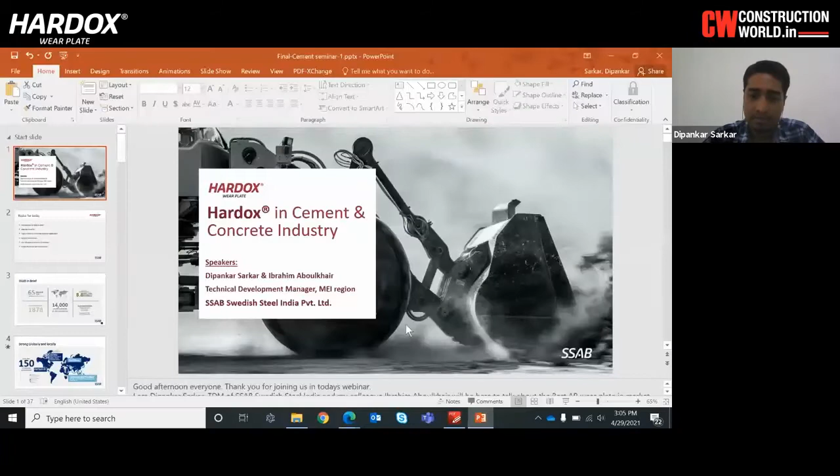Good afternoon, everyone. I hope you are seeing my screen right now. My name is Dipankar Sarkar. I am the Technical Development Manager for SSAB Swedish Steel India Private Limited. I'm taking care of India operations, and with me, my colleague from Germany, Mr. Ibrahim Aboulkhair is here, and he's looking after the Middle East regions. And today we'll be talking about the various applications of Hardox wear plates in the cement and concrete industries and how it benefits the customers.

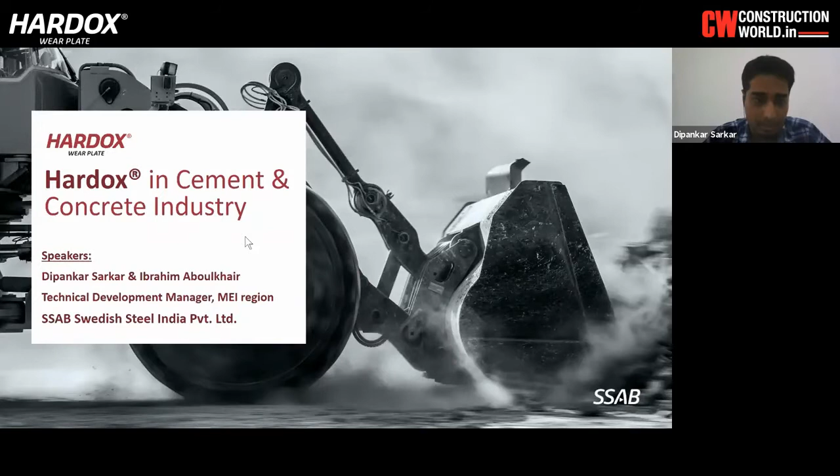SSAB in brief. SSAB Swedish Steel is present in the global steel market since 1878, that is more than 140 years old. We have a production capacity of 8.8 million tons annually, and currently we have 14,000 professionals who are supporting our customers in 50 countries. Despite having a pandemic year, we have managed to score annual net sales of 65 billion Swedish krona. We have mainly three steel divisions: SSAB Special Steels, SSAB Europe, and SSAB Americas. And we have two subsidiaries, that is in Finland, Tibnor and Ruukki Construction.

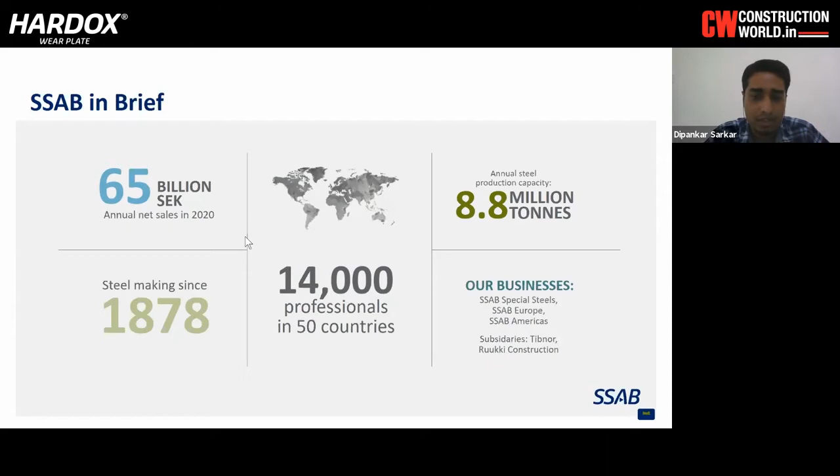So how we are present globally and locally, as you can see in the global world map, we are covering more than 150 countries with our sales support and tech support. We have 5 production plants in Nordic countries and 2 production plants in USA, in Iowa and Alabama. We have 3 production units in Sweden and 2 production units in Finland. We also have a tube and section manufacturing unit in Finland.

In India, we have 4 regional sales managers to look after all the commercial parts and sales support, and 2 technical development managers, including myself. There are 2 warehouses in Chennai and Mumbai, which have a total capacity of 7,500 tons.

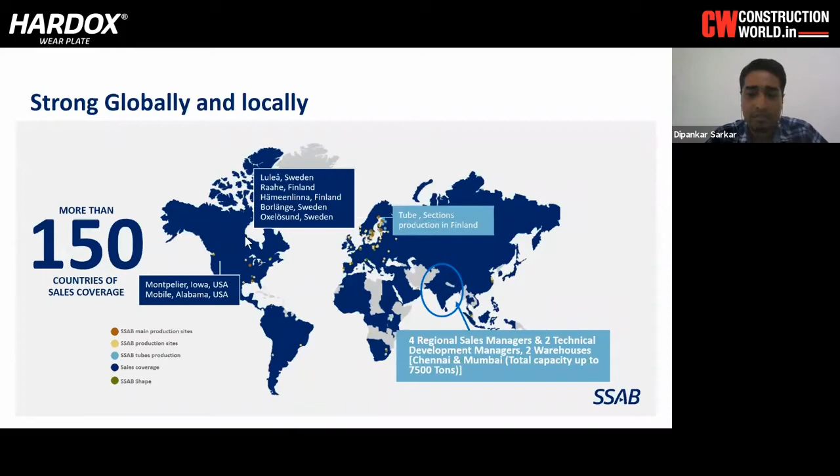So how are we upgrading? In order to upgrade the abrasion-resistant steel, we have a vision in SSAB, that is to make a stronger, lighter, and more sustainable world. To realize that vision, we provide high hardness and high strength products to increase service life, and also increase the strength of the product while having the capacity to reduce weight.

This also results in lowering production cost. And when you reduce weight, it leads to less fuel consumption and less CO2 emission to the environment. So we are not only benefiting the customer, we are also benefiting the environment.

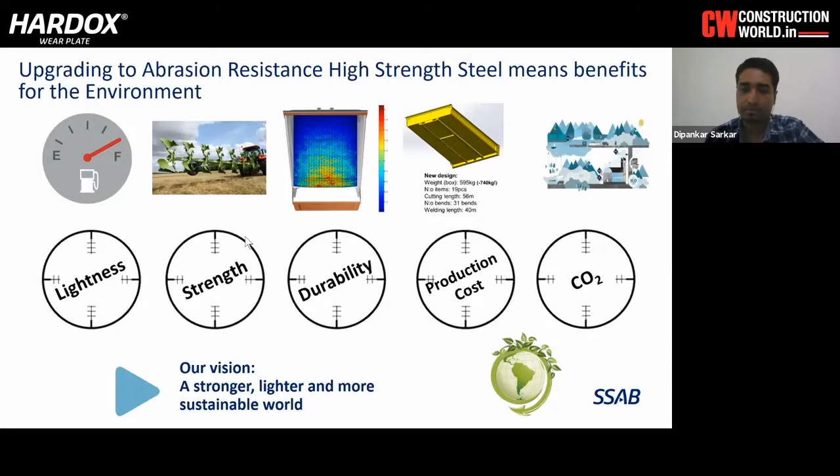So different types of wear which we currently face in challenging environments like cement and concrete industries. We mainly have 3 types of wear which we can see in the photographs: sliding wear, impact wear, and erosion wear, which we can also see in the cement and concrete industries.

So in sliding wear, as you can see, the abrasive particles slide down on the wear plates and micro cut the wear plate surfaces, and the wear plate surfaces will worn out.

In impact wear, the abrasive particles fall at a particular angle and velocity on the liner plates, as you can see, and the wear plate will be subjected to impacts because of these abrasive particles.

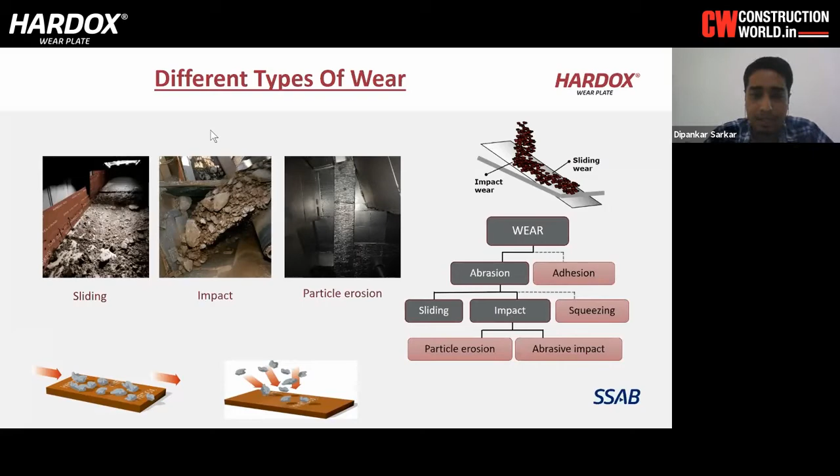In particle erosion, there is wear from particles having bigger and smaller fractions, falling from a particular angle and a particular velocity, and it will worn out the steel plates and wear plates in the application.

So, the Hardox wear plate product portfolio. Hardox is the trademark from SSAB, and we only can produce the Hardox wear plate, and nobody else in the world can produce the Hardox wear plate.

What we offer to the customer is that Hardox wear plates provide extreme durability because of the best combination of high hardness and excellent toughness. We have a range of 400 bhn to 700 bhn of hardness currently supplied to India.

In the thickness range, we can go from 0.7 millimeter to 160 mm. And in width also, we can produce up to 3.35 meters.

We have an upper hand in through-thickness hardness properties, and the properties are very much isotropic, meaning they are the same in all directions of the plate. We also have the market's best workshop properties, in terms of cutting, welding, and bending.

We also have some guaranteed toughness options in our Hardox wear plates. And we also make tubes and bars of 400 bhn to 500 bhn material.

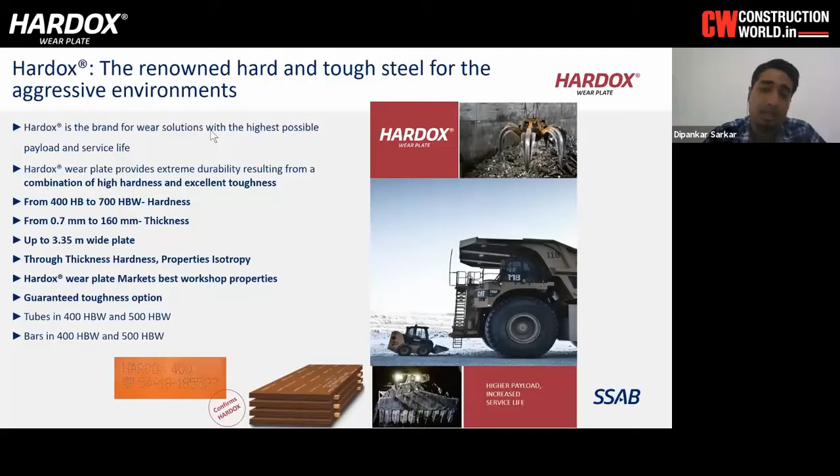There are many challenging areas we are working on, and we are trying to upgrade them with our Hardox wear plates. This includes tippers and trailers, construction and yellow goods, mining and quarry, mineral processing, waste and recycling industry, metal and plastic industries recycling, and also agriculture and forestry industries.

We have live case studies where we have done upgradation with our Hardox wear plate. And today we'll be talking more about applications in the cement and concrete industries.

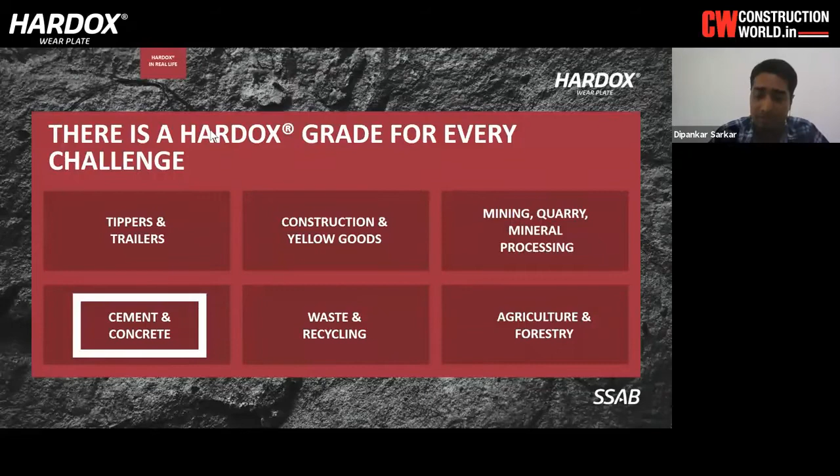In terms of describing the competing materials in this aggressive and challenging environment, we have very hard materials like ceramics, which have very high hardness, but don't have the impact toughness in their property. So it won't withstand the exact criteria of your application if it's subjected to impact or erosion.

Now we come to the chromium carbide overlay plates, that is hard particles overlaid in a soft matrix like mild steel. It also has its own limitations in impact toughness properties. So where applications are subjected to impact wear, it won't sustain - it doesn't have that adequate impact toughness property. So it will only be limited to sliding and erosion wear applications.

And then we come to rubber. Rubber is a soft material, and it has its own impact toughness, and it can withstand very heavy blows, but it doesn't have the proper hardness to withstand sliding wear in the application. So it also has the limitation of hardness. So in terms of combining high hardness and high toughness properties, Hardox wear plates succeed in upgrading these three applications. In terms of hardness and toughness, it has the best combination to withstand all three applications.

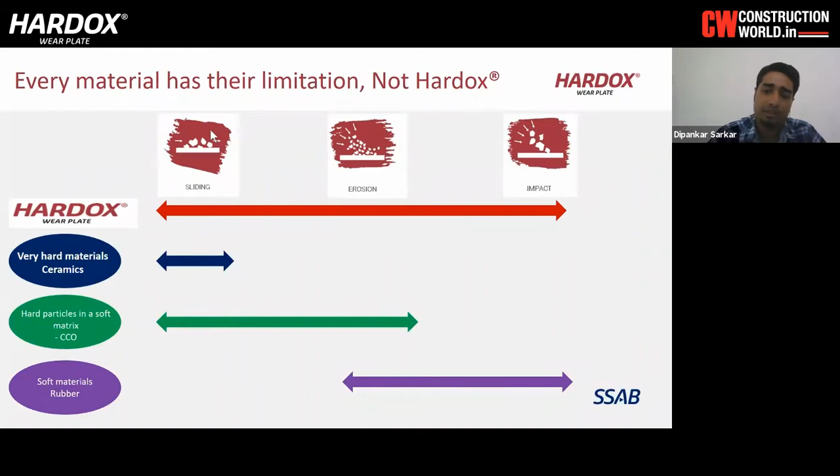So understanding the abrasive materials is very important. We can see the rock example here. Normally what happens is rock or abrasive particles consist of a number of minerals, and minerals have their own level of hardness. So checking the hardness of these abrasive particles helps us understand what type of wear is happening and what type of hardness level should be there in the wear plates for your particular application. So we are currently trying to understand that and give you the correct solution.

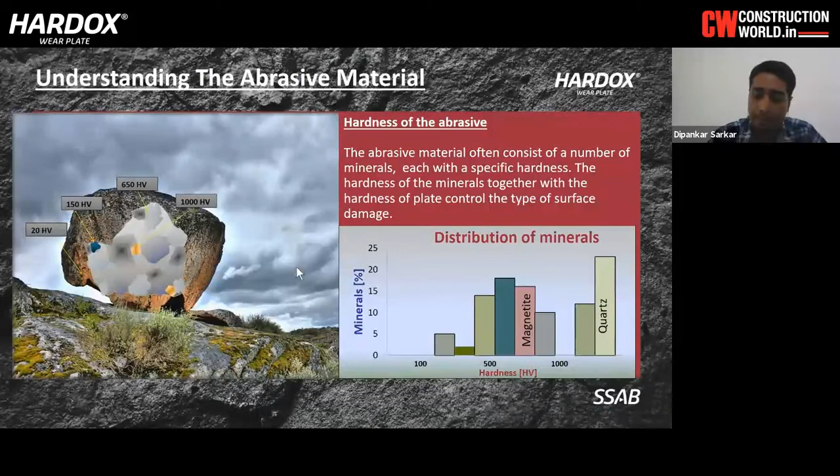So what is required in cement applications? Understanding the abrasive particles and the level of wear happening in your applications.

You can see this is a high level of wear where the abrasive particles are very dominant, and the abrasive particles' hardness is dominant on the wear plate surfaces. So it goes with micro cutting - it cuts through the surface, and the wear of the wear plate will be very high.

So according to the level of wear, we give a solution on what type of suitable hardness level you should have for your applications to minimize this level of wear, and also with high hardness and high strength, how we can allow the customer to increase the load carrying capacity, the payload capacity, and achieve weight reduction to make the structure light, with increased wear resistance and dent resistance, to give improved service life. So currently we are trying to solve this kind of problem with our Hardox wear plates.

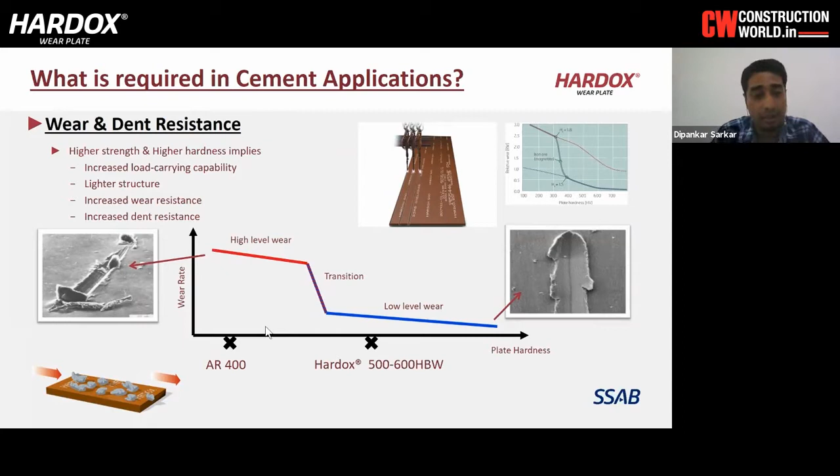So, configuration of liner plates: we are currently making these by trying to understand from the abrasive particles what type of application you are having. Then we try to understand the worn-down criteria - at what worn-out thickness you are stopping the machine and going for maintenance.

Suppose you are using 20 mm liner plates, and the criteria to take the machine into maintenance stop is 90% of the worn-out thickness. So how are you trying to maintain that, how are you going for a maintenance stop?

So what we do here is look at the configuration of the liner plates you are having, the application, and the nature of the abrasive you are using, and then we design the liner plates in a way that the main impact area has the best toughness property to withstand abrasive particles falling from an angle and velocity.

And the side liners and end liners, which are only subjected to sliding wear - because there will be no such impact, or very minimal impact, on the side liners, but that part will be subjected to sliding wear - should have the proper hardness. So that's how we currently configure the liner plates for your particular application.

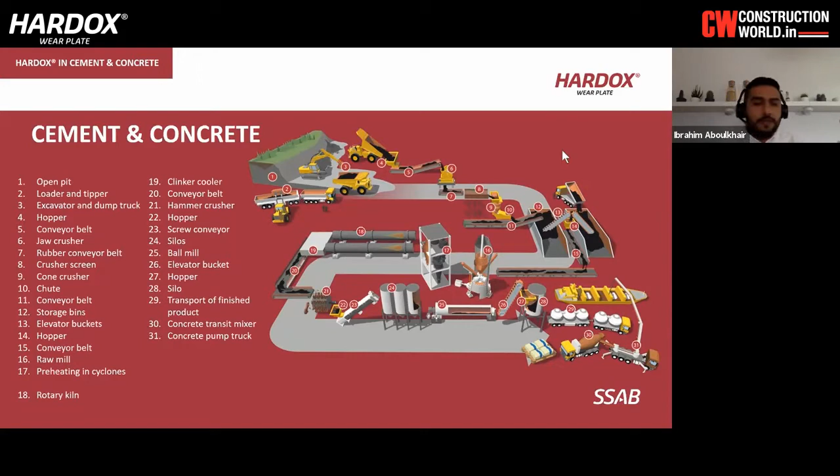So we spent a lot of time, in more or less a couple of minutes, to discuss what the cement industry is and what we can support with the Hardox wear plate. Now we go a little bit deeper into each application on its own to define what can be used.

If we take the loaders and excavator buckets or shovels, we have a lot of parts here. For example, the shell part, which is the internal curved part and is roll bended, can be produced either from 450, 500, and the optimum would be 500 tough. As I said, the 500 tough gathers all the great features of Hardox 450 with its structural abilities, as well as the 500 abilities against sliding wear. So 500 tough is more or less the future of the 450 and 500 plates.

Then we go to the wear pads on the sides, in which you have Hardox 500 or 600. The reason we use this is that it's mostly sliding wear, and for that it's not a problem to use 500 and 600, which will extend the service life very much.

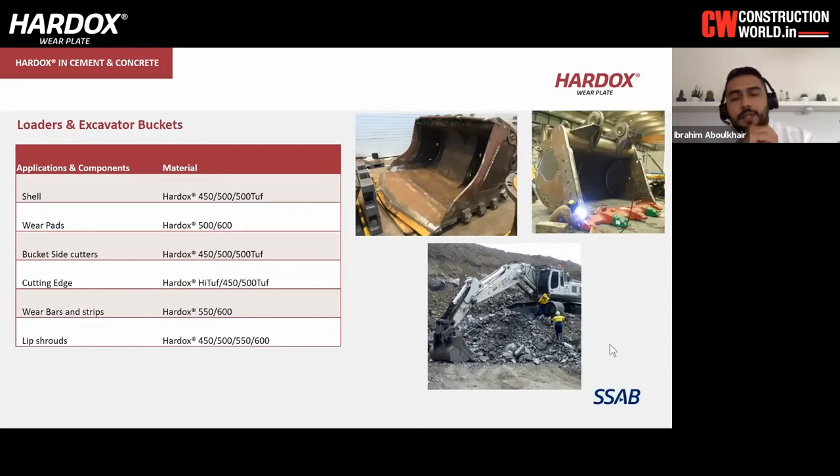Going to the bucket side cutters, which are on the side, usually we also recommend 450, 500, and 500 tough. I would personally recommend the 500 tough, because the side cutters are not only facing impact from breaking or hitting into the rocks, and not only wear due to carrying the rocks, but there is one hidden use for that. The side cutters more or less work as a structural component because they hold the shell together with the cutting edge. So they have also a structural use, and for that the 500 tough would be an optimum solution.

Moving forward to the cutting edge, which is usually the front part that will cut into the rocks and face more or less some impact as well as some sliding wear, of course.

For that, we have specific grades, high tough, which is a grade of 350 Brinells but has superior toughness for a wear plate. There is no other wear plate in the world that has the toughness of the high tough. The idea of high tough is that it can be used in areas with very low temperatures, which I think is available in India as well, in some mountains on top where you have very low degrees. In that case, high tough would be a solution. It's more or less for cold areas where impact toughness is really required.

Also for the cutting edge, the 450 and the 500 tough are a solution, as well as Hardox 500.

Then we have the wear bars and strips, which are also 550 or 600. The reason for that, again, is mainly sliding wear, straight sliding wear. There isn't a lot of impact, and that gives an advantage for the Hardox 600 as there is no impact at all.

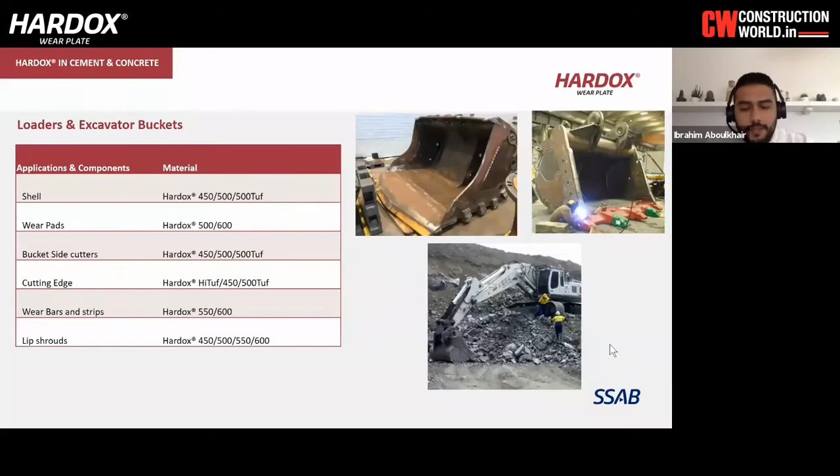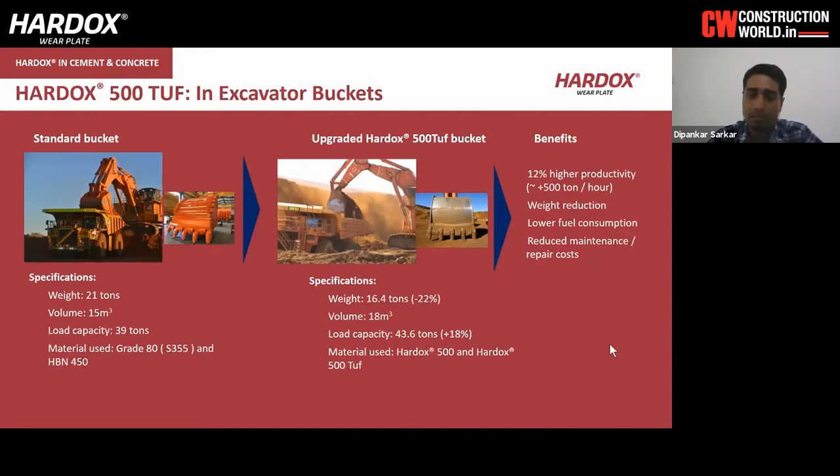So with these benefits, they have 12% higher productivity, weight reduction, and lower fuel consumption. As Dipankar said, we are moving in the direction of low carbon dioxide emissions and saving the environment worldwide. Also, reduced maintenance and repair is very important, since it helps you avoid stoppage in work and the costs of maintenance.

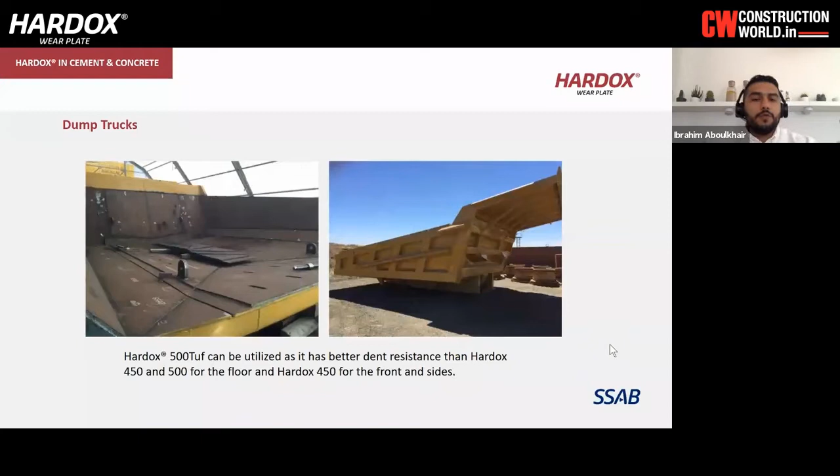In the next slide, now we speak about the dump trucks. We finished the loaders and excavator buckets, and we move to the dump trucks, in which we also have the mother plate or structure itself, and then you usually only change the liner package. As you see in the picture, some parts are cut and then assembled as liner plates. Hardox 500 Tuf is the optimum solution.

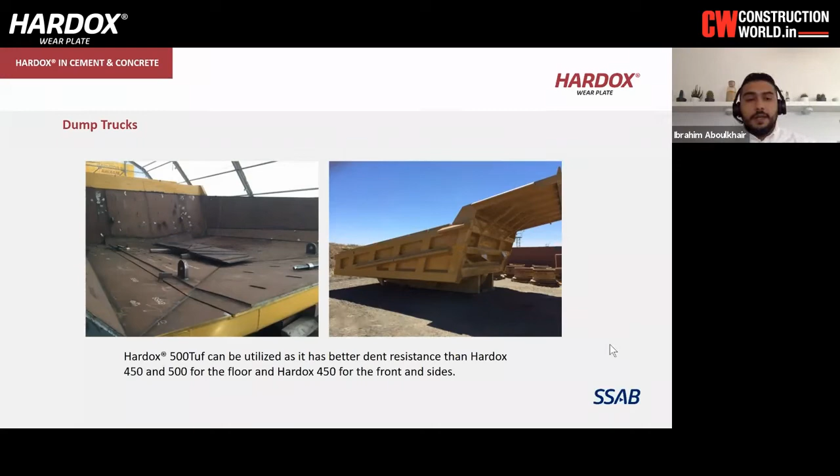The reason for that: tipper bodies carry big rocks, but not as big as dump trucks carry. Since the rocks are bigger and harder, you need higher dent resistance. 500 Tuf has proven better resistance to dents, plus you gain 50 Brinell difference from 450 to 500 in hardness. So Hardox 500 Tuf can be used for the complete floor, sides and front, no problem, since from Hardox 450 the impact and sliding wear is somehow less.

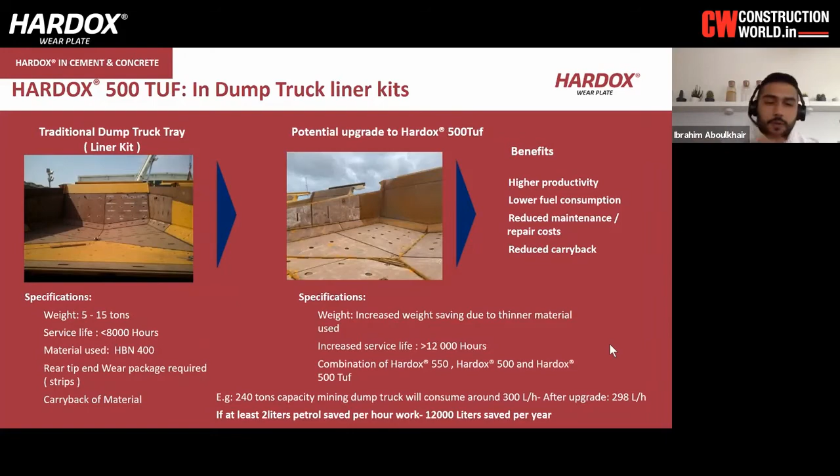Benefits: higher productivity, lower fuel consumption. Again, maintenance stops are a headache in each quarry, cement plant, or whatever site you have. If you have maintenance stops, you're losing money with no production, and that's what we can support you with. Next slide, please.

The idea is that we add triangular Hardox parts on top of your liner. It doesn't have to be triangular, it can be circular, strips, or whatever. The main concept is that usually you have a combination of smaller and much bigger rocks. The gaps between those triangles, strips, or circles are designed smartly, not just mounted on. The gap between each one allows the tipper or dumper to hold one of the small rocks in between those wear pads.

What does this help with? When rocks are trapped between the liners or wear bars, bigger rocks roll over the smaller rocks instead of sliding over your plate. So you're wearing out the smaller rocks rather than your dumper body liners, which extends the service life a lot. This smart solution can be done with Hardox 450, 500 Tuf, and the wear bars can be made from 550 or 500 Tuf as well, increasing service life very much.

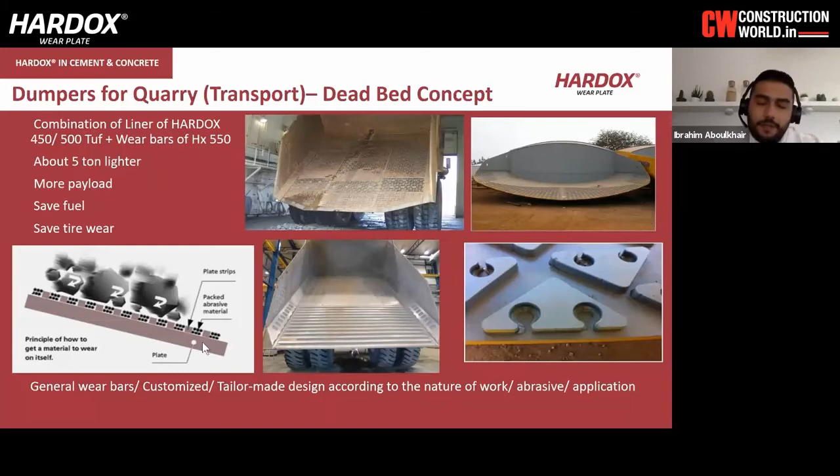So we finished the excavator and loader buckets, and the dump trucks. Now we go to the tippers.

Just briefly, in tippers I really like this segment because there's a lot of improvements that can be done when upgrading from mild steel tippers to Hardox tippers. The idea is that in the sides we avoid using stiffeners, and instead use bends to increase the stiffness so you don't lose the stiffness of the tipper. The shape allows carrying bigger rocks, and you have a lot of wear savings.

In the floor, decreasing the thickness from mild steel to Hardox alone gives around 20% weight savings. So the floor thickness reductions help a lot in weight reduction.

Then we have the top rails, which are more or less the structure holding the whole tipper together. The design of these top rails has to be done smartly in order to avoid stability problems like buckling and so on. So the design has to be done in a very nice way. Still, you also decrease some weight in that.

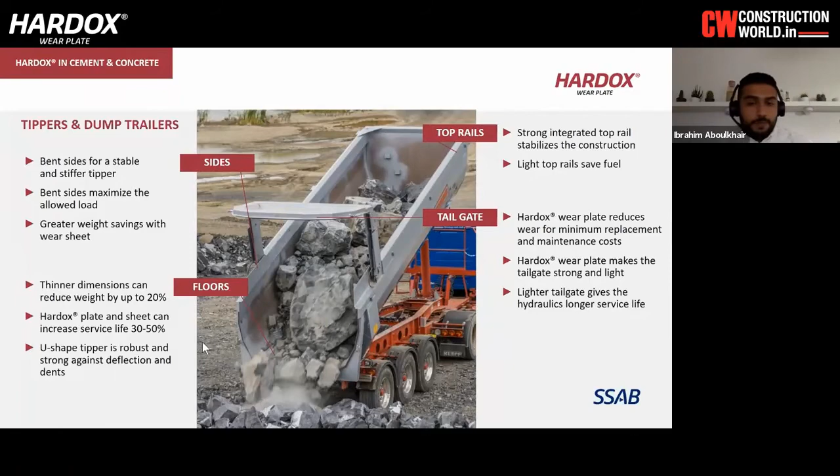And finally the tailgate, which is more or less the part where you have the most damage, due to the driver driving with rocks locked onto the gate, as well as when tipping, where the hydraulics get a lot of damage. So having Hardox in the gate will extend the service life, as well as protect your hydraulics, which are very expensive for each tipper, and without them you cannot move.

Next slide, please. Then we get into the cement plant. We have a lot of hoppers and drain chutes, and in that case they're regularly exposed to high flow, pressure, and impact. Using Hardox to fight wear and abrasion will extend the service life and improve the performance of your chutes and hoppers.

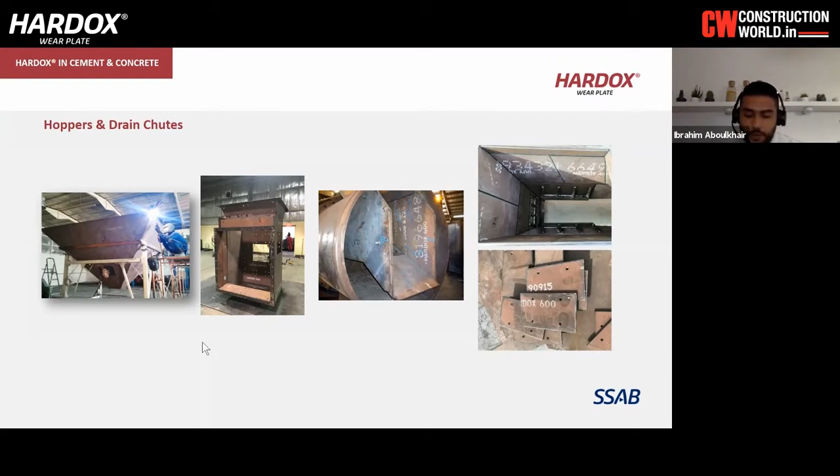Grades that can be used depend on the impact. You can use Hardox 500 Tuf. If it's more or less sliding wear, we recommend directly Hardox 600 in order to extend the service life as much as possible. Next slide, please.

Conveyor belts and screw conveyors. Usually the conveyor belts are rubber but relined with steel plates. Like I said, that's sliding wear, completely straight sliding wear. So more or less Hardox 600 can be used without any problem, since you don't have any impact problems in that case.

In the trough and tubes, you can also use Hardox 450, 500, or 500 Tuf, which will extend the service life of your screw conveyor.

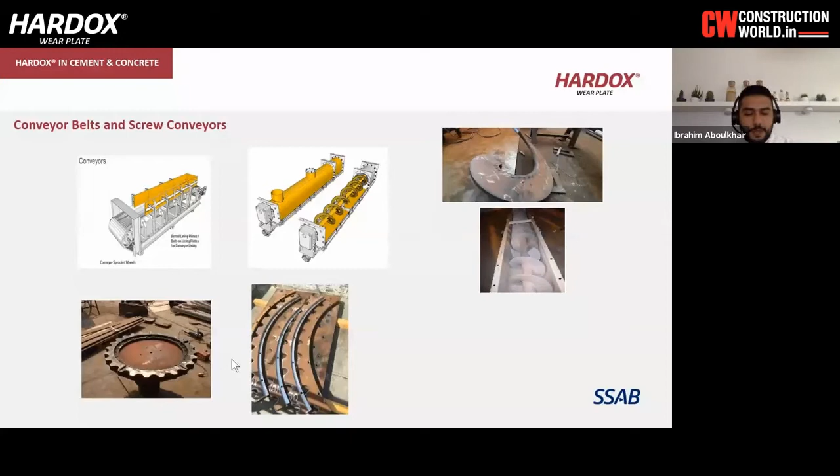Then we go to the screens. Sorting screens can be used to pre-sort, classify, or size split, as we discussed at the start of the presentation. Only the parts that have reached the required size can pass through. For that, Hardox has proven great performance, depending on the thickness, whether there's any complex shape, whether you need roll bending, and so on.

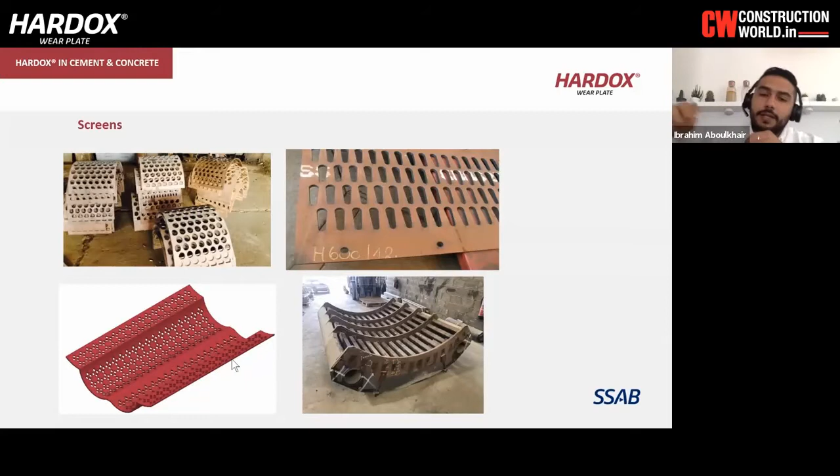Then we have the grizzly bars on the bottom right. The structural parts holding the grizzlies together can be done from Hardox 450 or Hardox 500 Tuf. The grizzly bars themselves can be done from Hardox 500. Next slide, please.

Then we have the elevator buckets. There are mainly 3 points that I would like to discuss here. The first one is quite easy: the bucket itself, made from Hardox 450 straight, has a quite long service life.

It can be more than 4 years, so you don't have a headache with that. The second point: when you have damaged elevator buckets, the main problem is the cutting edge. If you have a problem there, you can use Hardox 600 as a strip in the front to improve the wear performance. So Hardox 450 for the bucket, Hardox 600 for the cutting edge.

Finally, the third point is the casing of the elevator bucket itself. It can also be produced from Hardox 450, which can extend the service life as well. I think in India, SSAB has had some success cases with that too.

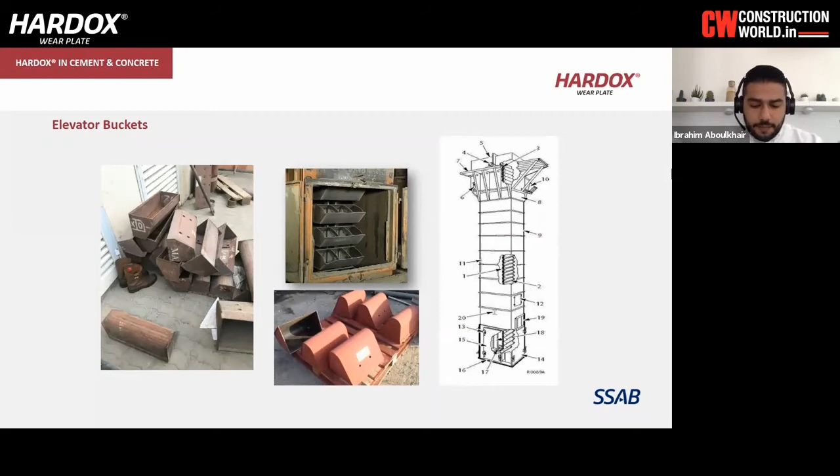We have some success cases using Hardox 600 there. Usually it's used in chromium carbide overlaid plates, but using Hardox 600 will reach quite close service life to the CCO, a little bit less, but you save around 30 to 40% in costs. So for 2 sets of Hardox 600, you may buy 1 set of chromium carbide overlaid plates - you're paying more money for less time.

We also have the reject cone, which can be produced from Hardox 600, depending on the roll bending radiuses. And then again, the grinding table can be made from Hardox 600.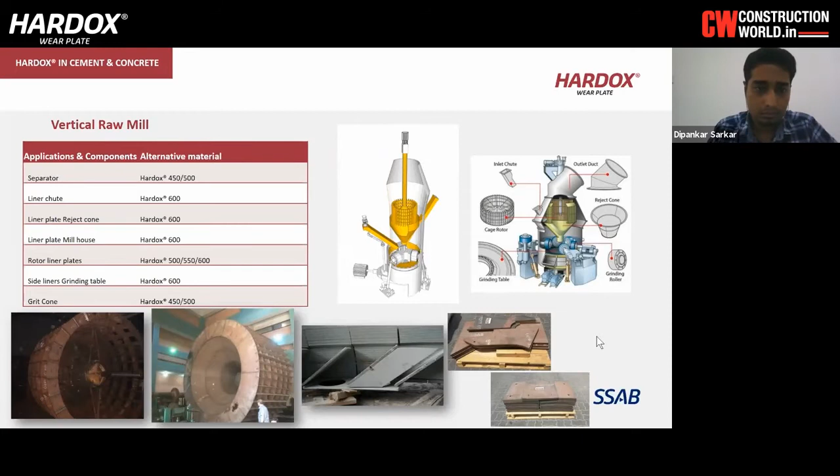Then after that, we have the centrifugal fans, which is a usually very important part, because all the fins can be produced from Hardox 500 due to the much better sliding wear resistance. Usually it's fighting a lot of contamination from quartz, which is a problem when it comes to sliding wear. So Hardox 500 can be used in a nice way in this part.

Also for the cone on the top and the bottom plate, they can be done from Hardox 500 as well - it's not a problem at all with roll bending. We can support the processing, as well as the casing, which can also be done from Hardox 500 to improve the service life when it comes to the sliding wear.

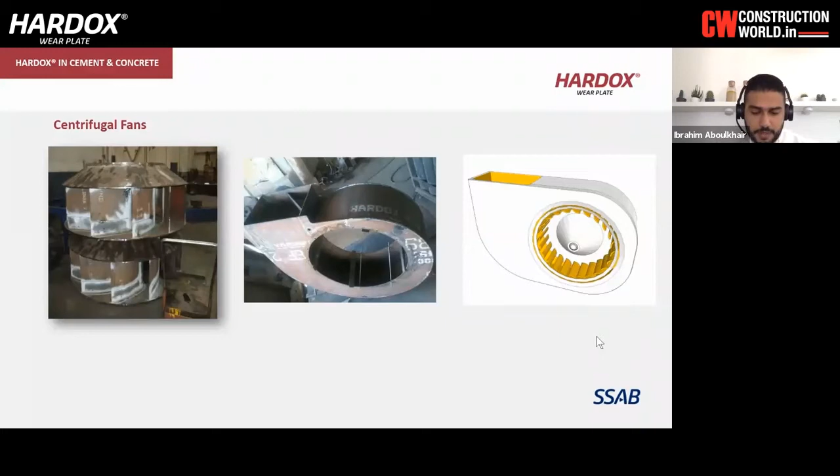Next slide, please. We move afterwards to the cyclones. The cyclones preheat the output of the vertical raw mill to be transported to the rotary kiln. At some parts, we have cyclones that are still not at a very high temperature, so it can be produced from Hardox 450 and 500 Tuf, as shown in the pictures below.

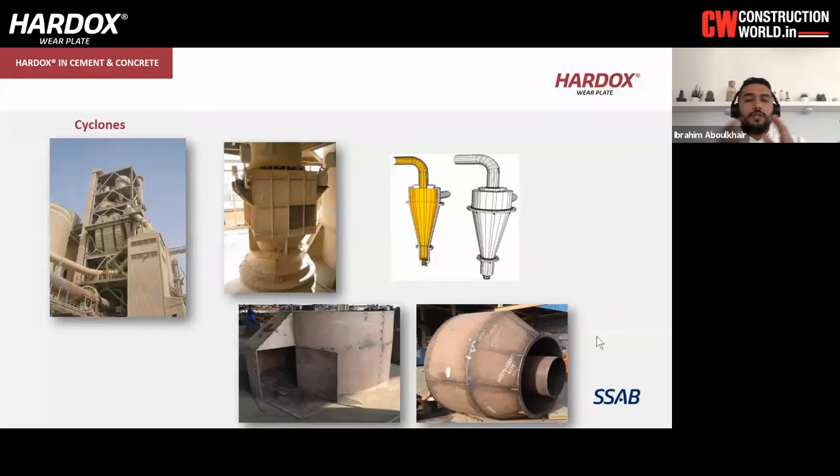Later on in the cyclones, it becomes around 900 degrees, which is quite hot for Hardox, and there we have some other solutions. Wear liners in the cyclone walls made from Hardox are extremely strong, and not only strong - they can reduce the weight, which helps a lot in the maintenance stops needed to change the liners. Next slide, please.

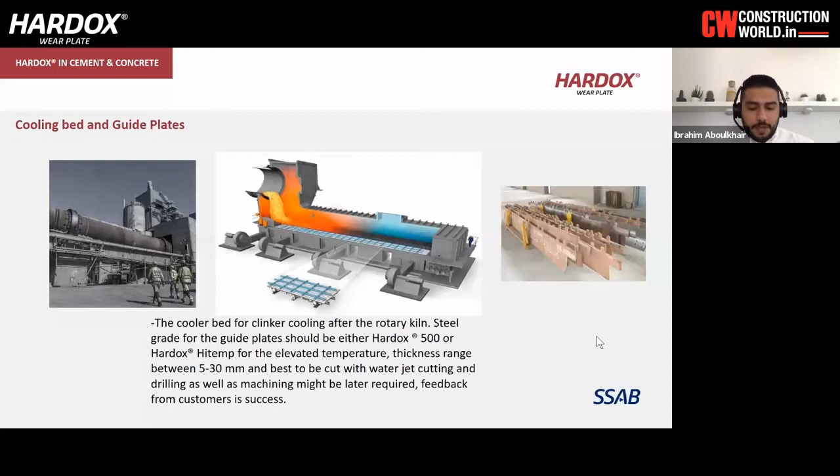Then we move to the rotary kiln. In the rotary kiln especially, we don't have a lot of applications, since the temperature is between 1000 to 1500 degrees. The only thing we can speak about is that after the heating, there are some cooling beds with guide vanes dividing the flow. The temperature at that point is up to around 500 degrees, and for that we have Hardox HiTemp. It's usually between 5 to 30 millimeter water jet cut, and we have a lot of success cases for that especially. Next slide, please.

In the hammer crushers, this is a very important part. In some liners, if the temperature is still very high, we can use Hardox high temp. In other cases, the hammer itself can be produced from Hardox 500, 550, or 600. The main thing is that sometimes the hammers are quite thick, up to 120 millimeter.

Below that, we have the grizzly bars that we discussed in the screens. And we discussed the high temp already in the liners. Next slide, please.

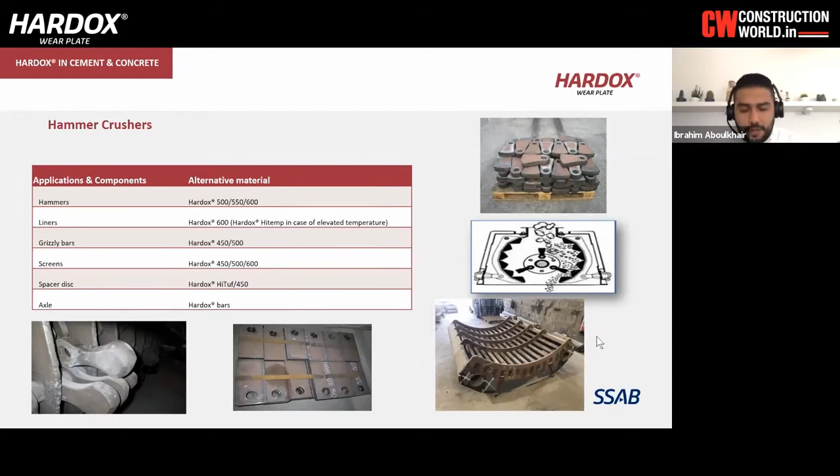Then in the final parts of a cement industry, we have the silos, which are used more or less for homogenizing, and they more or less define the size of a cement plant. In some cases, they are also relined, especially the internal cones. They are relined or produced from Hardox 450, 500, or 500 Tuf.

Then finally, we have the last grinding step, which is the ball mill. The ball mill is relined with more or less castings, but the castings cause a lot of problems. The weight is very high, which requires a lot of power, which is a lot of money, as well as the noise of that is very high and it's not allowed in many places. The solution for that is that we use Hardox 500, 600 embedded into rubber to decrease the weight and to improve the impact toughness using the rubber's ability for that, and it performs much better than the castings.

One more application: as you can see in the middle part, there are two green diaphragms. One is the intermediate and one is the discharge. So we have two sections in the mill. One is for grinding to a certain size, the second one is for grinding the second size. Those diaphragms have proven a lot of success in many cases from Hardox 600 especially.

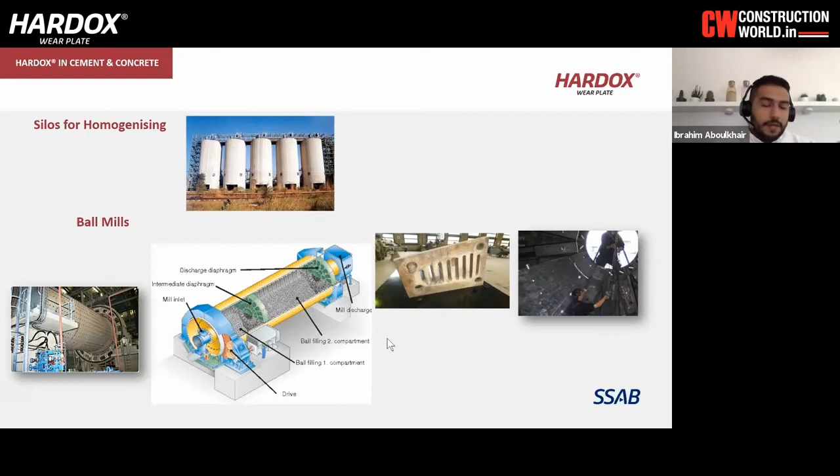Since it's more or less, there is no impact on them, they are quite on a different direction than where the impact is happening. They only pass the grinded material to the next section. For that, it's only sliding, and Hardox 600 has proven a lot of success in that. So you have at least 15% more service life than castings in the diaphragm, 15%. And that's quite huge for the ball mills.

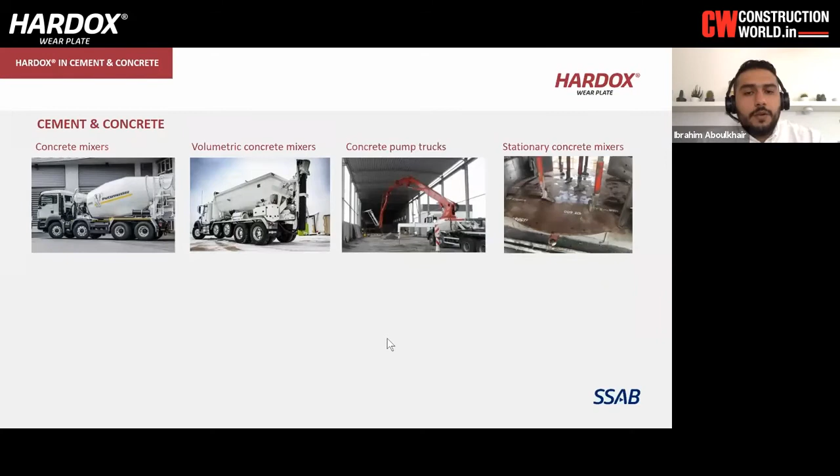Then we have the concrete. We go to the concrete. Usually we have concrete mixers, concrete pump trucks, and stationary concrete mixers. We can move to the next slide directly. We are running out of time.

In this case, I've chosen one example. If you take a look at the left side picture, you see the drum itself in the red color, which is produced from Hardox, and the chassis in the blue color, which is produced from Strenx material, Strenx 700. And then inside, we have the drum shell, and we have the fins in the middle. Most of the wear is usually on the fins. The drum is having wear, of course, but the fins are the highest affected part.

We have one example to show you on the bottom right part. We have one drum from mild steel, and we have one drum from Hardox 450. The fins are from mild steel on the left side; the fins are from Hardox 450 on the right side. The drum on the left side is 6 mm, the fins are 8 mm. We reduced the drum to become 3 mm on the right side, and the fins to 5 mm.

By that, we reduced the weight by 1 ton, which means you have much less fuel consumption, and the cost of production decreased by 6%. So you upgrade to Hardox, you think Hardox is more expensive than mild steel. But at the end of the day, your complete manufacturing cost, which means material price, welding, cutting, bending, has decreased by 6%. So that's one of the benefits you get when upgrading.

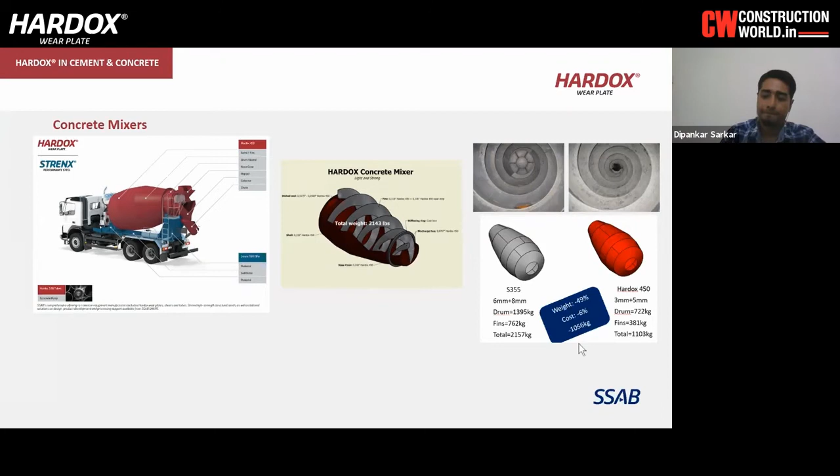Next slide, please. For the stationary concrete mixers, more or less the liners for different types of mixers, such as planetary, vertical, and mobile mixers, can be relined by Hardox 600 right away. In some cases, if there is some complex shape, it can be from 500, but usually if there is only a little bit of roll bending or if it's flat, Hardox 600 all the way.

And on the right side, you can see Hardox 600 in paddles. They are more or less 25 millimeter thick, and they are competing with Ni-Hard materials. Ni-Hard materials are very, very expensive, more or less the most expensive material when it comes to wear resistance worldwide. Comparing the service life of the Hardox 600 with the Ni-Hard, we have a 50% increase in service life in the paddles, and more or less an 80% decrease in cost. So Hardox 600 in that application is also great and performing quite well.

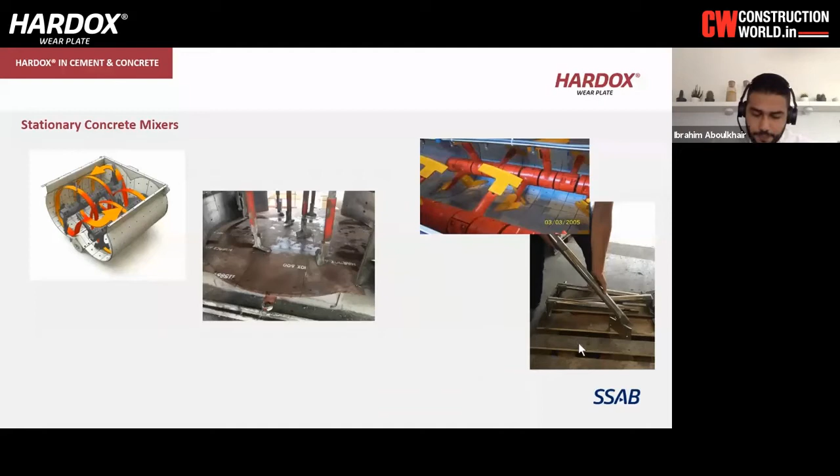Then finally, we have concrete molds in concrete. In that case, we have different types of concrete moldings. We have paver mold and building bricks, and we have several other types.

Hardox wear plate can increase the service life compared to mild steel by at least 3 times. We usually discuss this a lot with the TDM, Mr. Dipankar. In some cases, we have molding equipment that pours the concrete. After it solidifies, there is some vibration, and then they remove the equipment. Having Hardox is a little bit tricky because of the vibration and the toughness.

For that case, we have 2 types. The first type is when you have high frequency vibration but very short time, like 5 seconds. In that case, Hardox 600 can work quite well, quite fine. The fatigue life will not be reached, and you will not have cracks or any problems like that.

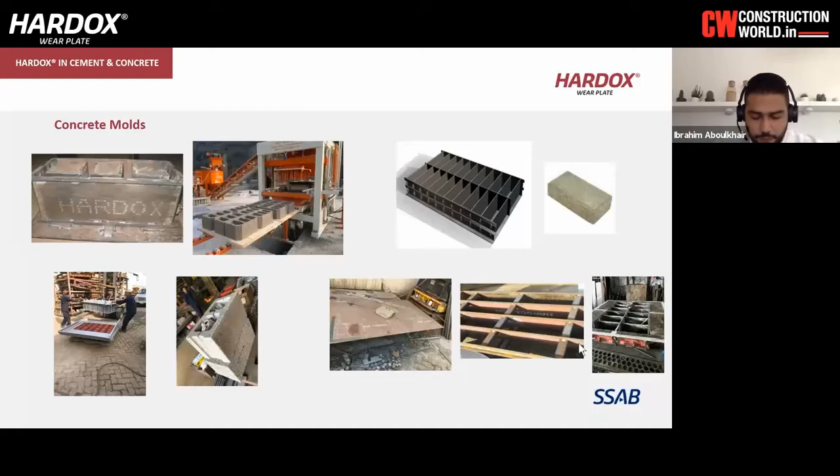In some other cases, we have longer times for vibration, but very low frequency, which can get to 2 minutes of vibration. For that case, we recommend Hardox 450 or 500 tough, since the impact toughness will also not be reached. For the Hardox 600, you can reach up to 1 million concrete blocks, and for the 450 and 500 tough, it's more or less also the same.

Next slide, please. Keep in mind the conclusion: understand the material processed and what kind of wear it imposes on the different applications, which means you have to study what rock you are working with, what is the hardness of that rock, the shape, the sharpness, and so on. Be aware of areas where the temperature is over 250 degrees, as we discussed.

Service life increase means less maintenance, which means less maintenance costs and less downtime. Weight savings mean more payload, you can be more productive, and less fuel consumption, less costs, as well as less environmental damage. You have to think about availability when you are using CCO plates or castings.

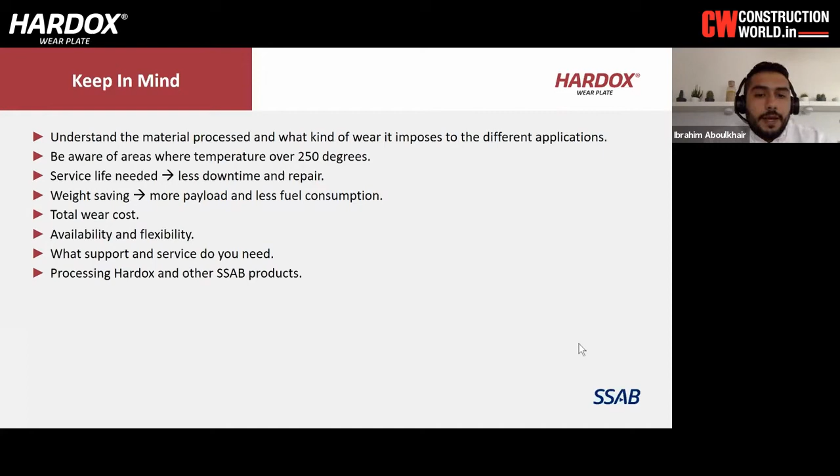It's not available all the time, and the price is quite fluctuating. With Hardox, it's much easier. You can get supported by a wear part center or a steel service center, and the material is always available in stock. We can support you, of course, technically in all cases, especially in the processing of Hardox and other SSAB products in the workshop.

Okay, regarding any commercial matter, you can always come back to me. I'll share this commercial questionnaire, like cost differences and all, with our regional sales manager.

And for Hardox, fixing holes can be drilled easily. Yes, with the correct parameters, you can easily drill the Hardox wear plates. We have the machining recommendation guidebook for your perusal.

If I can put one more point here, Dipankar, I'm sorry. For drilling Hardox, it's quite easy. There are some recommendations - very important, do not preheat before drilling.

Try to use, when it comes to lower grades up to 500, a radial drilling machine with very good fixations - no wood fixations - and proper cooling liquid. Above 500 Brinell Hardox, it's better to use either a milling machine or a CNC drilling machine. Do not use a radial drilling machine. Again, fixations cannot be done with wood, and you have to use the proper cooling liquid.